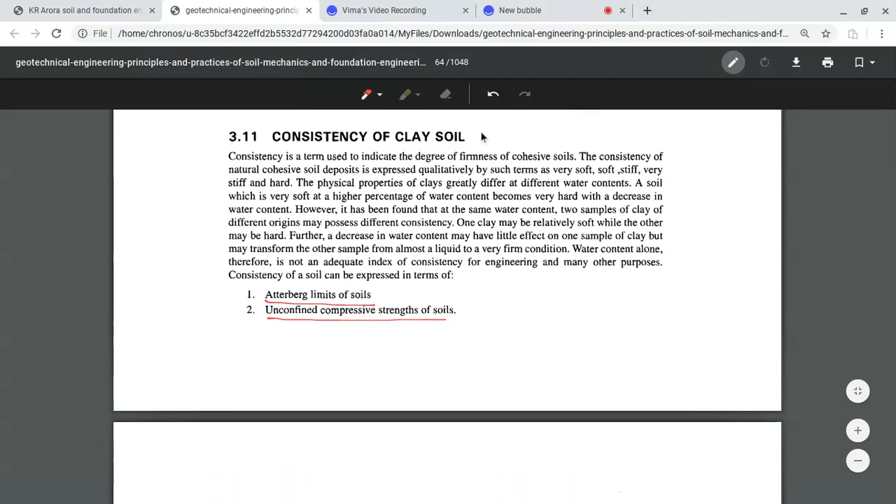Now, the consistency of clay soil. Water content alone is not an adequate index of consistency for engineering and other purposes. Consistency of soil can be expressed in terms of Atterberg limits and unconfined compressive strength of soil. Water content alone cannot explain the consistency, so Atterberg limits and unconfined compressive strength are necessary for the consistency analysis.

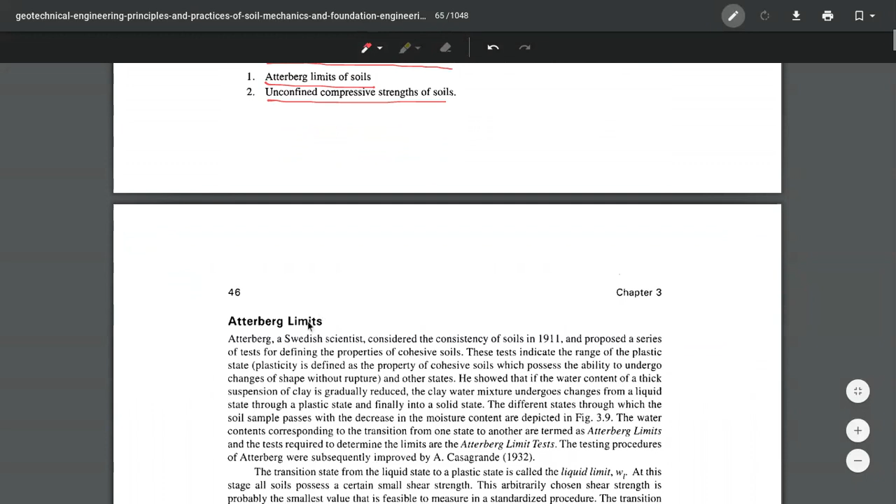Atterberg, a Swedish scientist, considered the consistency of soil in 1911 and proposed a series of tests for different properties of cohesive soil, indicating the range of plastic state of cohesive soil which possesses the ability to undergo changes of shape without rupture.

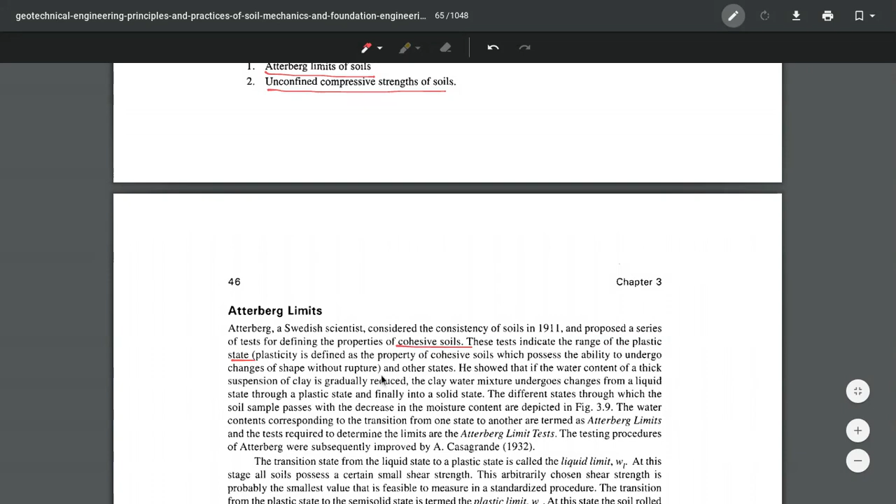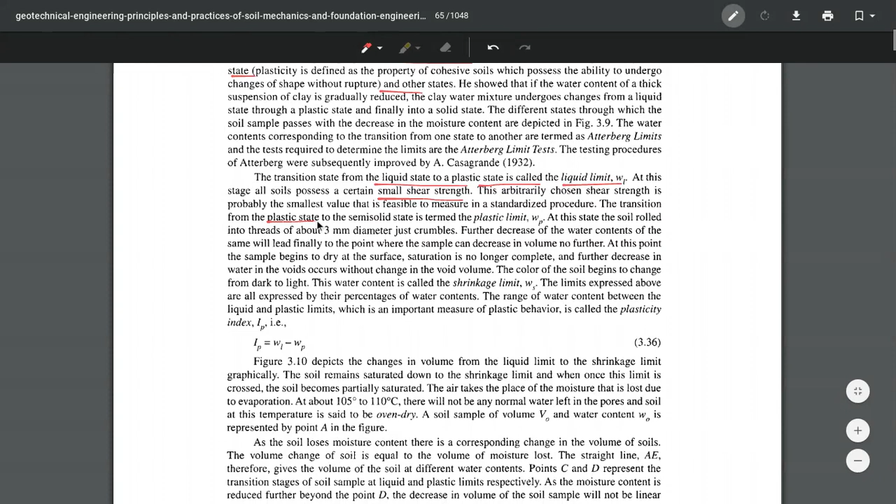Another state: the transition state from liquid state to plastic state is called the liquid limit. At this stage, all soil possesses certain small shear strength, shear strength is started on the soil. The transition from plastic to semi-solid state is the plastic limit (WP). WP is the corresponding water content at that transition state.

At this state, the soil rolled into threads of about 3 mm diameter just crumbles at the plastic limit. Further decrease of water content will finally lead to a point where the sample cannot decrease further in volume.

At this point, the sample begins to dry at the surface and saturation is no longer complete. Further decrease in water in the void occurs without change in void volume. The color of the soil begins to change from dark to light. This water content indicates the shrinkage limit (WS). These limits are all expressed as percentage of water content.

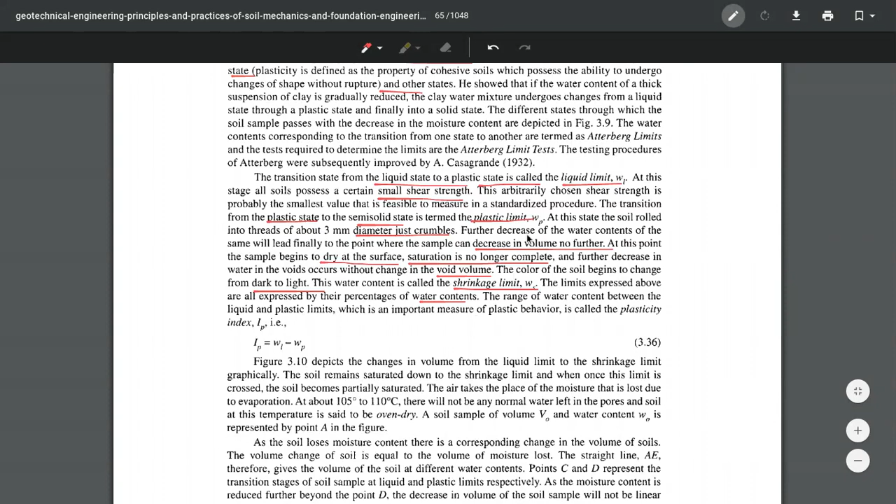Plasticity index equals liquid limit minus plastic limit.

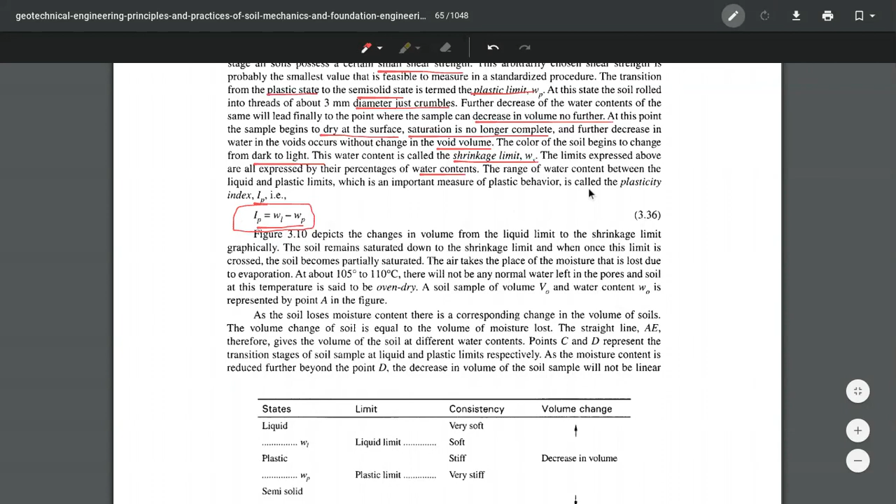This is liquid limit, plastic limit, shrinkage limit, and solid state.

This is the transition point at which shear strength just starts to be gained on the soil on further decreasing volume, and this is water content. Volume also decreases on decreasing water content. The soil just crumbles at the plastic state. Volume further decreases and a semi-solid state is obtained. This is the shrinkage limit; volume remains almost constant from semi-solid to solid state, with only decreasing water content.

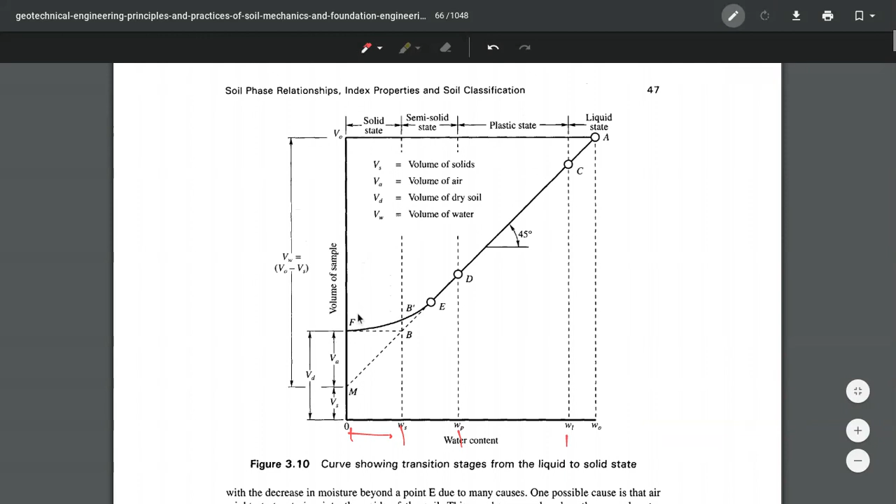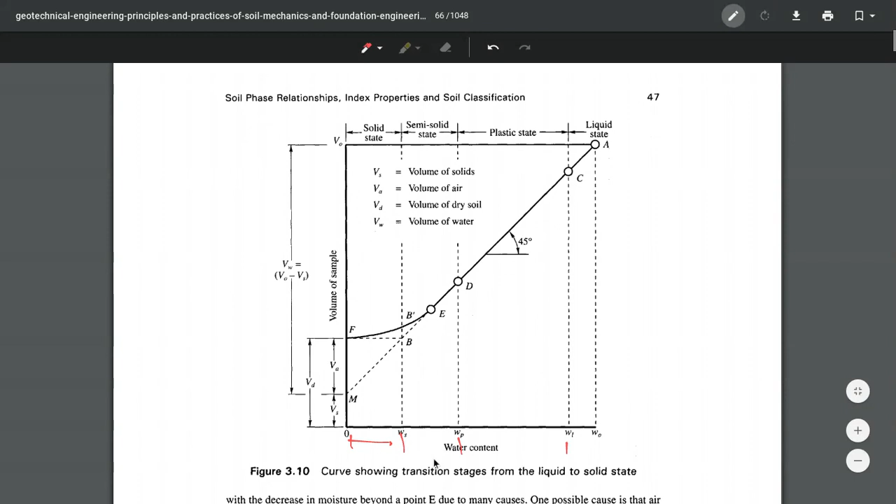This is called liquid limit, plastic limit, shrinkage limit, and liquid limit minus plastic limit equals plasticity index.

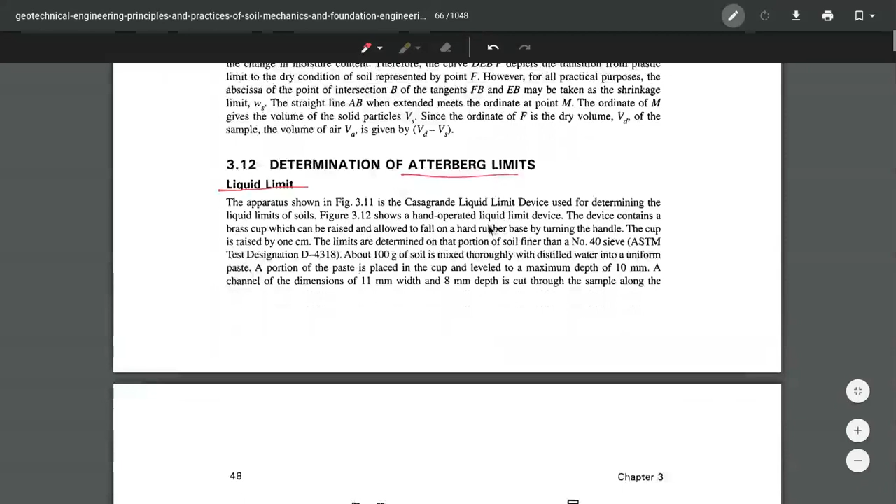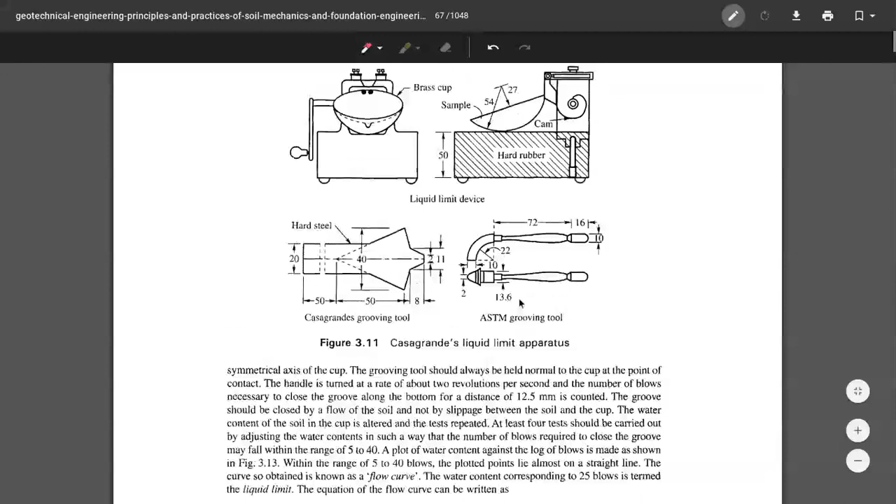Determination of liquid limit. These Atterberg limits are liquid limit, plastic limit, and shrinkage limit. This is the Casagrande liquid limit tool for the determination of liquid limit.

N is number of blows. C is a constant, IF equals the slope of the flow curve. Water content W equals minus IF log n plus C. The water content corresponding to 25 blows is termed the liquid limit.

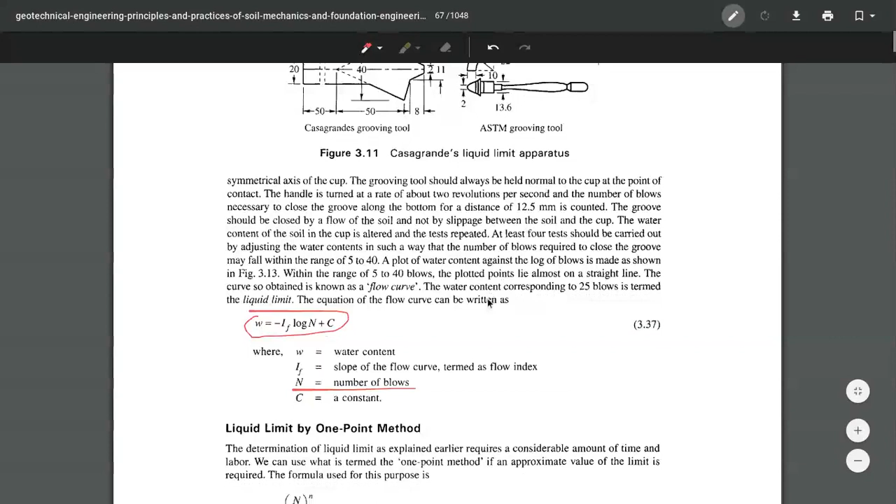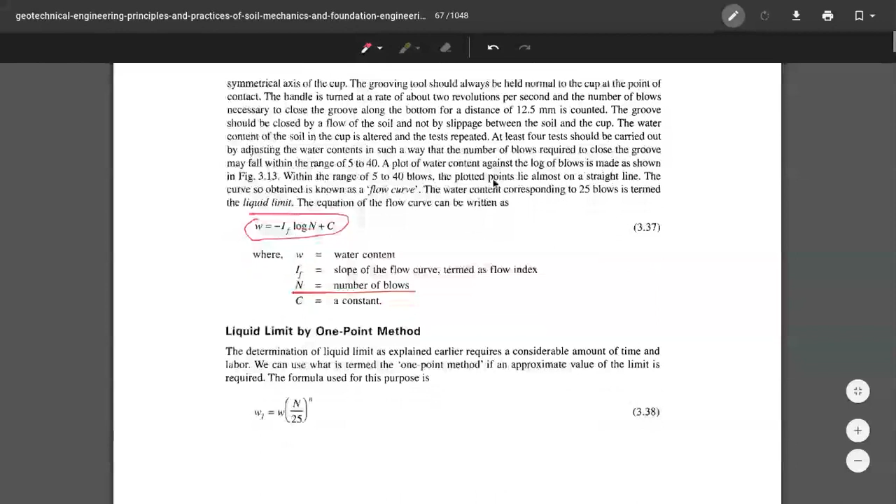In the Casagrande liquid limit approach, the water content corresponding to 25 blows is termed the liquid limit, from the liquid limit test analysis. So water content equals minus IF log n plus C, where n equals 25, C is any constant, and IF is the slope of the flow curve.

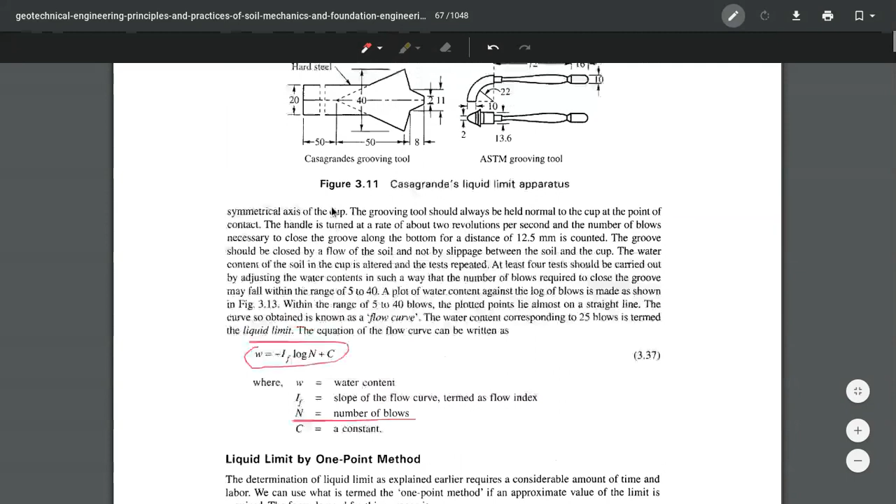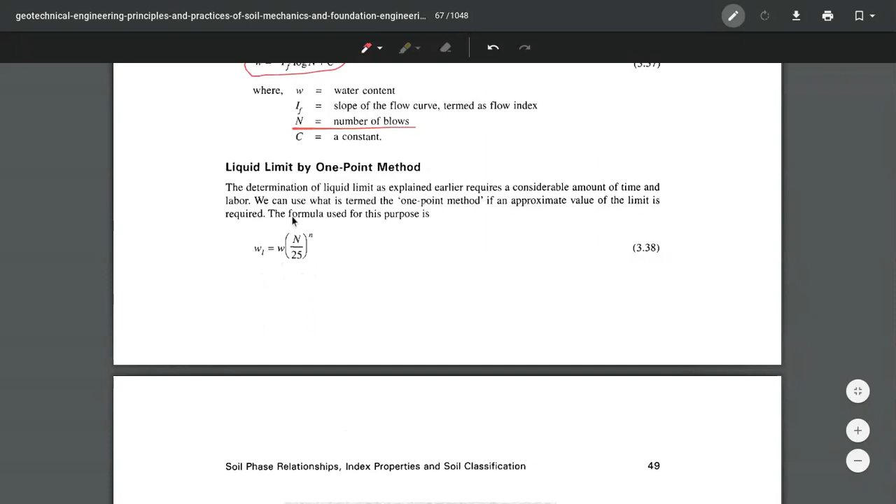By the single point method, liquid limit WL equals W times (n/25) to the power n, where W is the water content at n blows, corresponding to 25 blows.

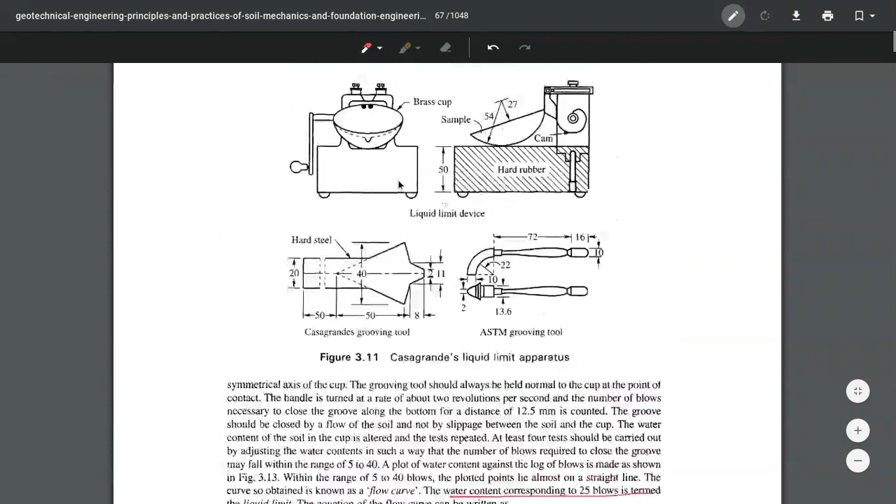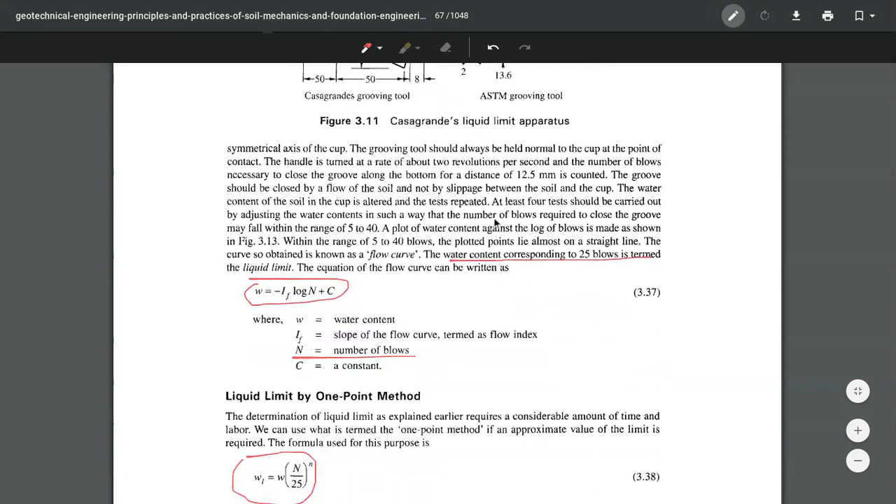This apparatus is used with 2 revolutions per second applied on the blow. Blows are applied at 2 revolutions per second.

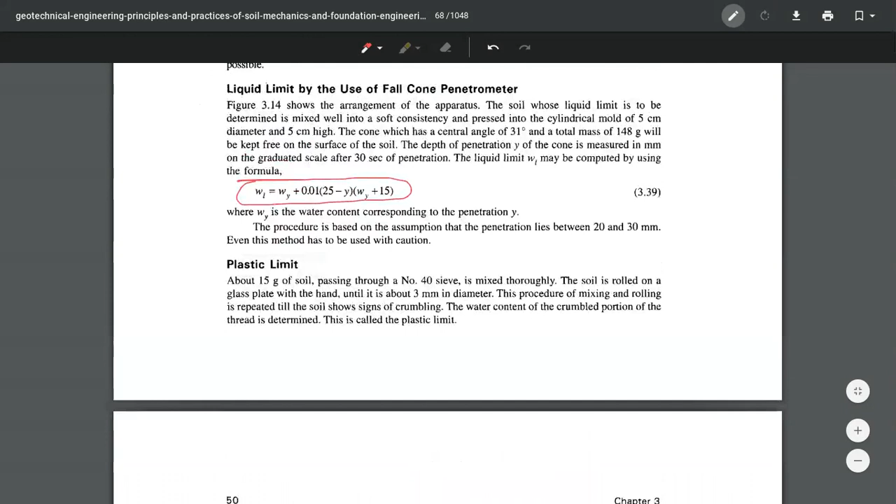About 15 grams of soil passing through the 0.425 mm sieve (number 40 sieve) is mixed thoroughly. The soil is rolled on a glass plate with the hand until it is about 3 mm in diameter, and the procedure of mixing and rolling is repeated until the soil shows signs of crumbling; the corresponding water content is determined. This is called the plastic limit.

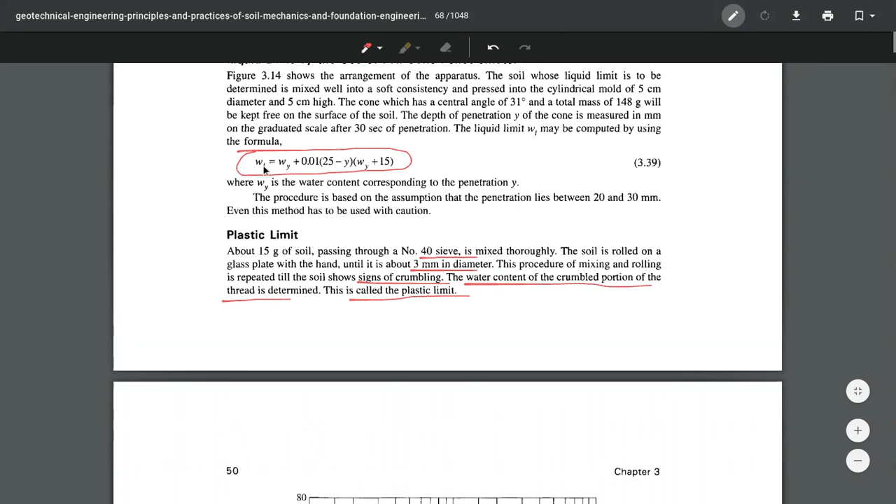At the liquid limit, shear strength just starts on the soil, and at the plastic limit the soil crumbles.

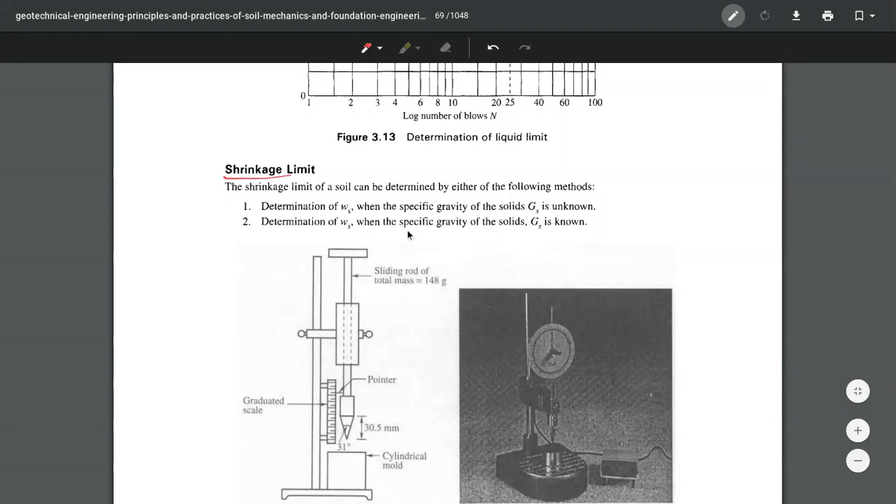Next, the shrinkage limit can be determined by the following method. When the specific gravity of the soil is unknown, the shrinkage limit corresponding water content is calculated differently than when the specific gravity is known. The method when specific gravity is unknown: shrinkage limit equals this formula.

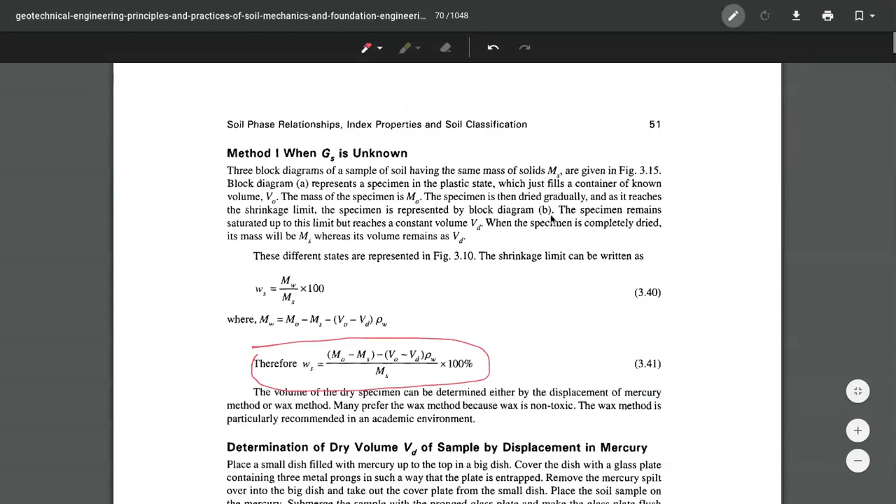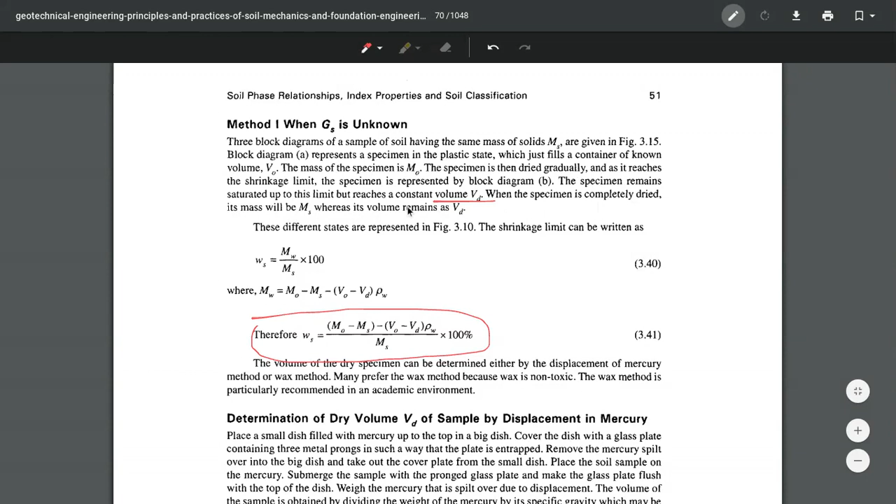Soil mass of solid ms and container volume V naught, mass of specimen m naught. The specimen is then dried till it reaches the shrinkage limit. This is represented by block diagram B, and the specimen remains saturated up to this limit but reaches constant volume V d.

W shrinkage limit equals m naught minus ms minus V naught minus V d times rho w, divided by ms, into 100%, where m naught equals mass of specimen, V naught is volume of the container, and ms is mass of solid.

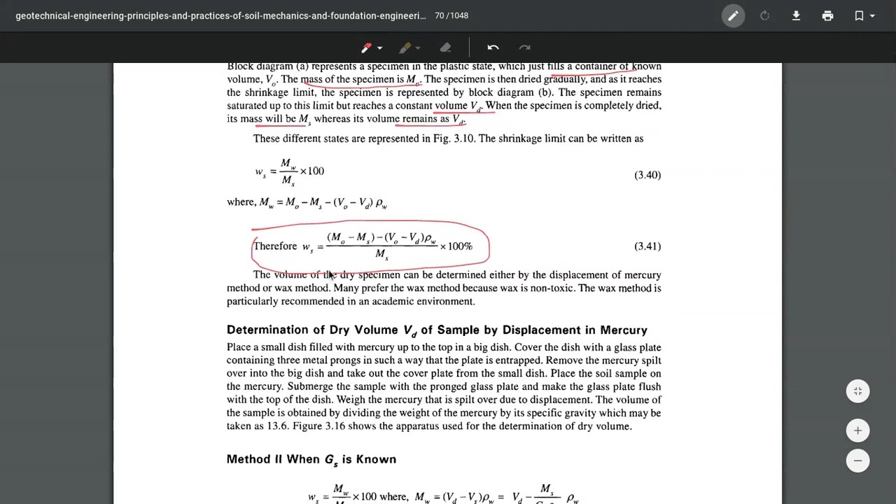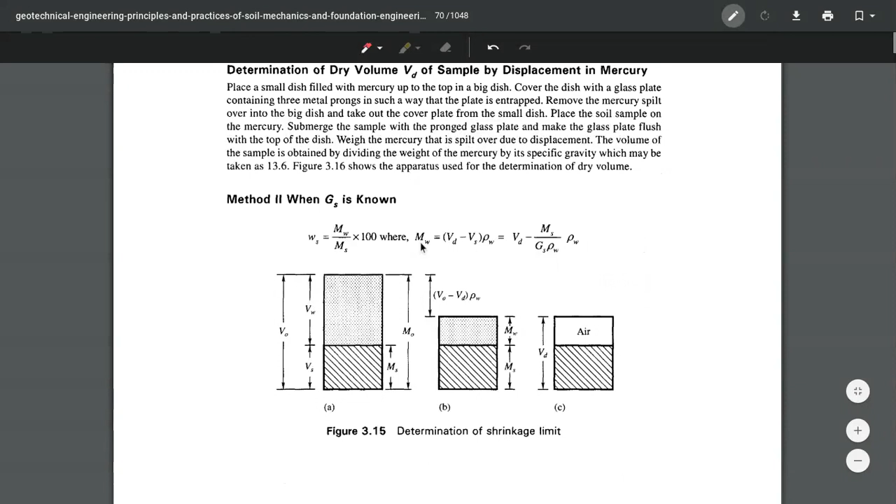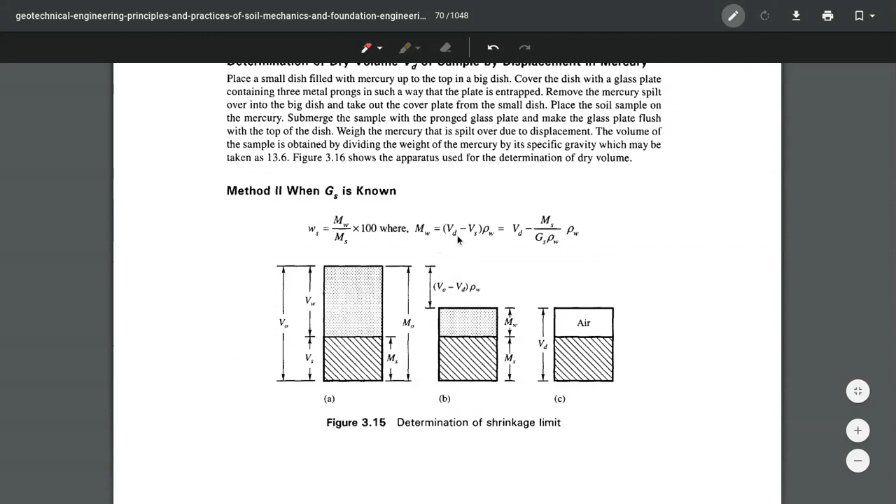Determination of dry volume of sample by displacement in mercury, V d. WS equals mass of water by mass of soil into 100% at shrinkage point. Mass of water equals dry volume minus volume of soil, into density of water, gives mass of water. V d represents no water, only soil and air.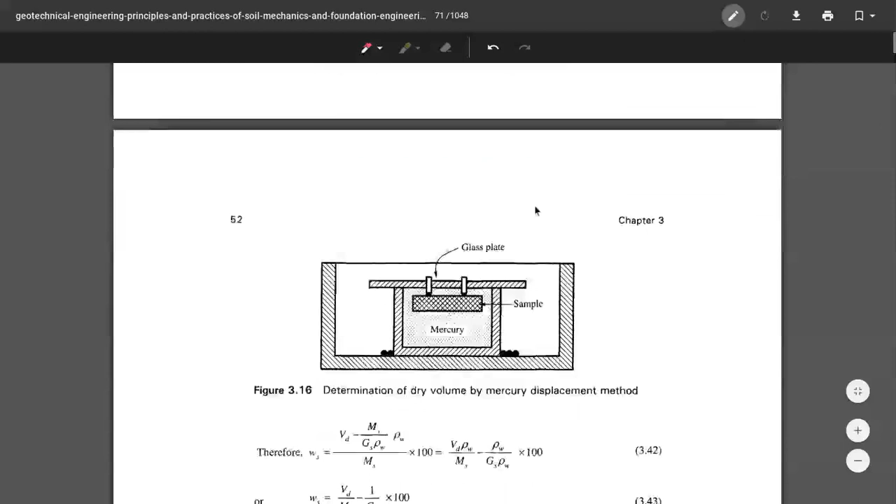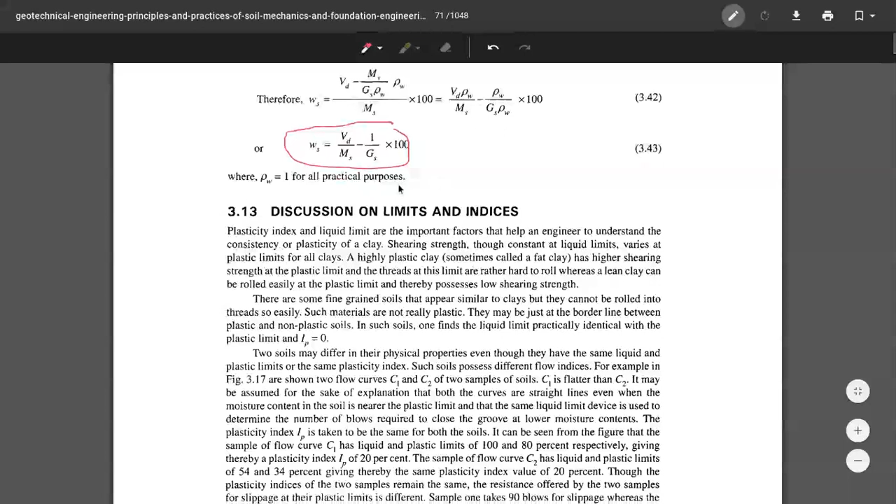Discussion on limits and indices. They may be just at the borderline between plastic and non-plastic, such that one cannot practically find the liquid limit, and the liquid limit becomes practically identical with the plastic limit, so plasticity index equals zero.

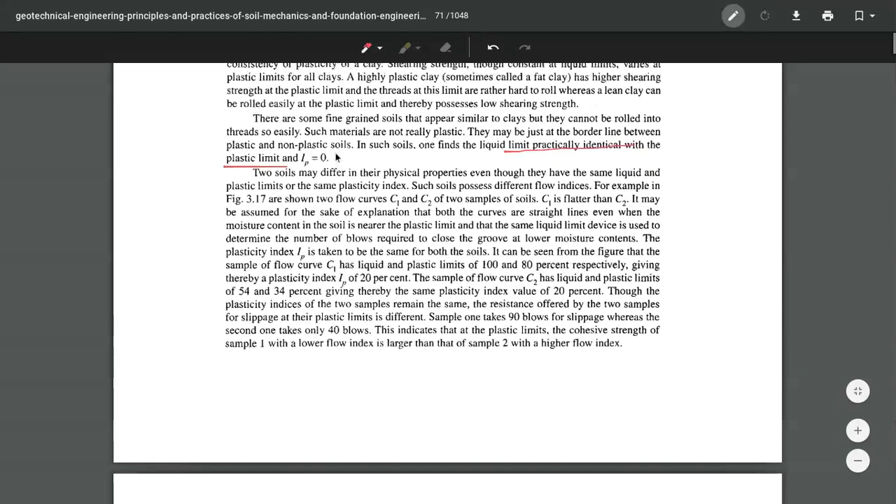There are some fine-grained soils that appear similar to clay but cannot be rolled into threads easily, so such materials are not really plastic - they cannot be rolled or crumbled. They may be just at the borderline between plastic and non-plastic soil, that is liquid limit equals plastic limit, so plasticity index is 0.

Plasticity index equals liquid limit minus plastic limit, plus 0 meaning non-plastic. Less than 7 is low plastic, 7 to 17 is medium plastic, and greater than 17 is highly plastic clay soil.

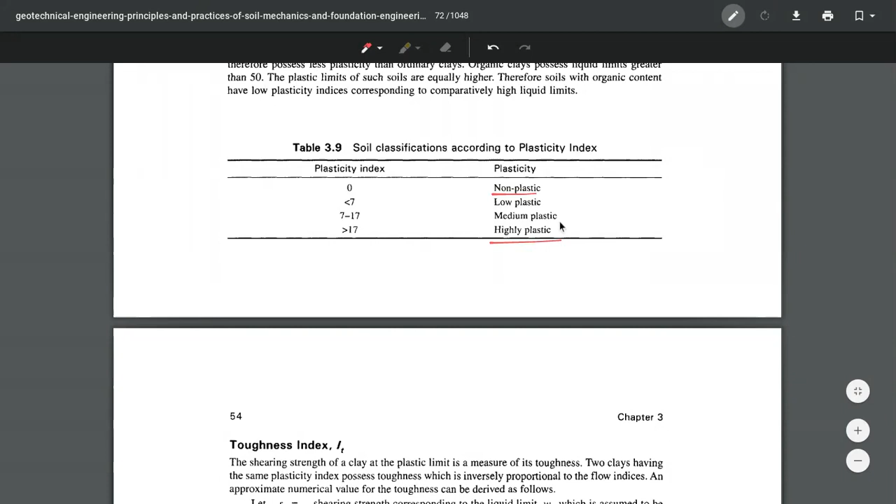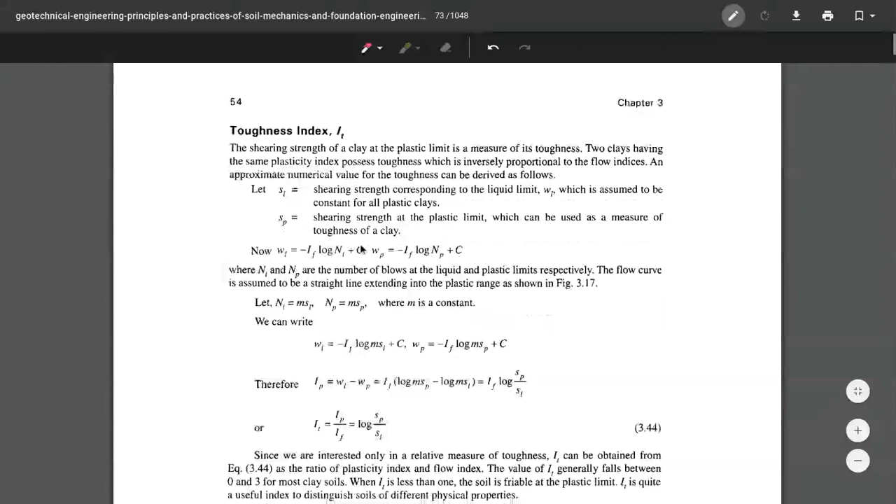Toughness index IT equals IP by IF, that is plasticity index by flow index IF.

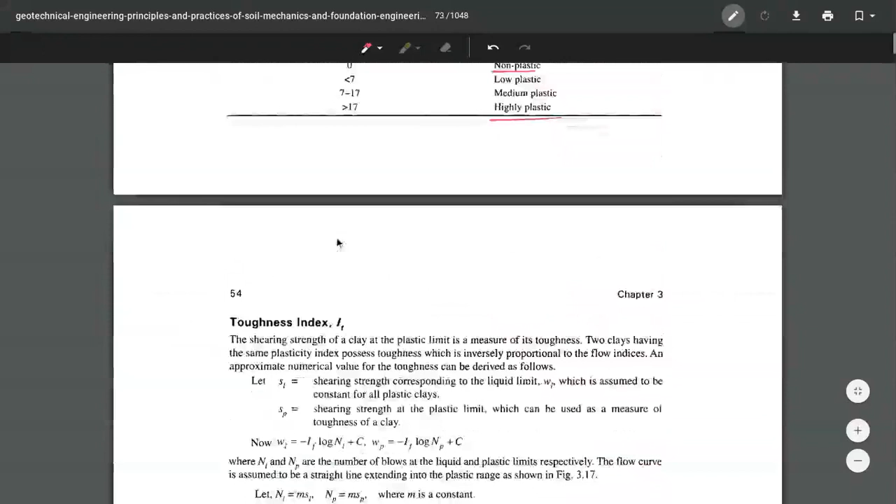Liquidity index equals WN minus WP divided by IP.

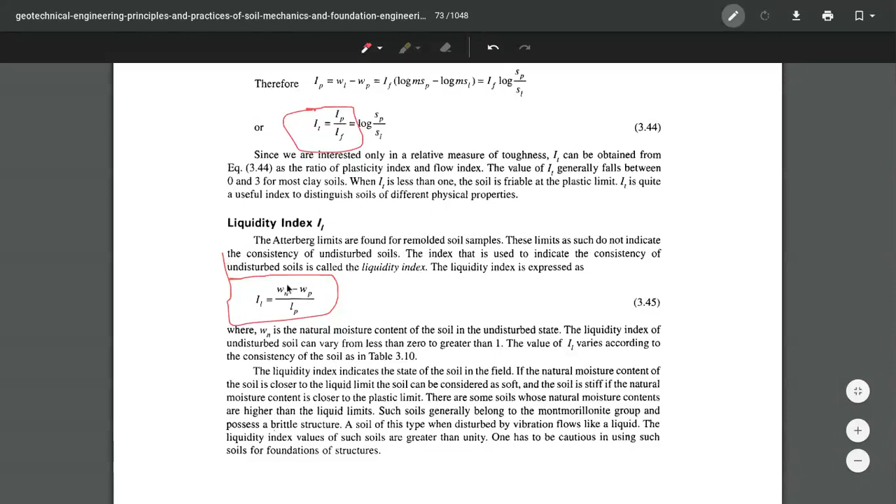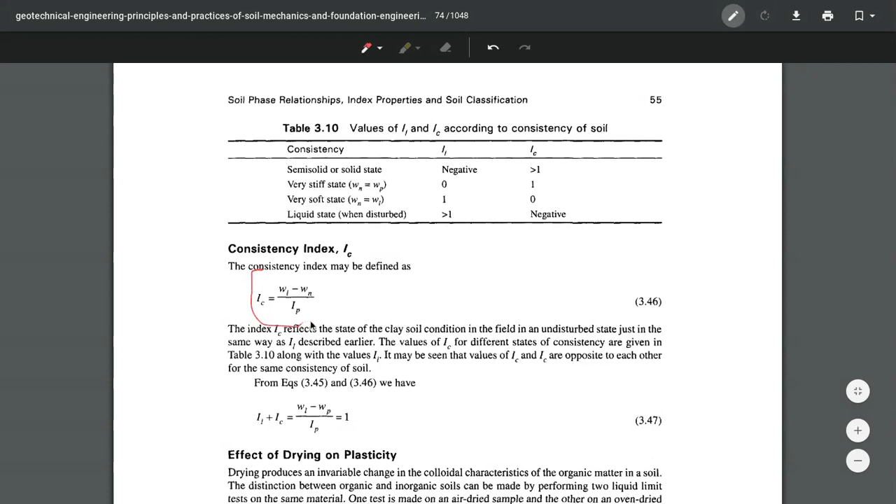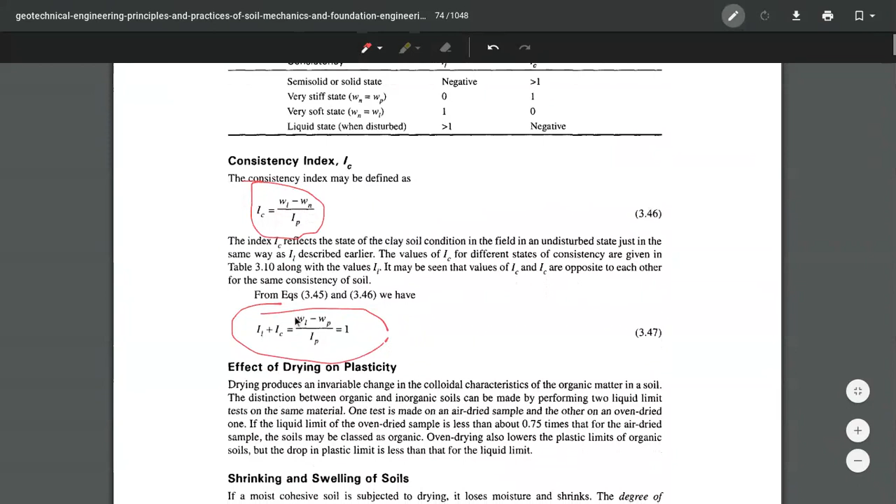Consistency index IC equals liquid limit minus WN divided by IP. Liquidity index IL plus consistency index IC equals 1.

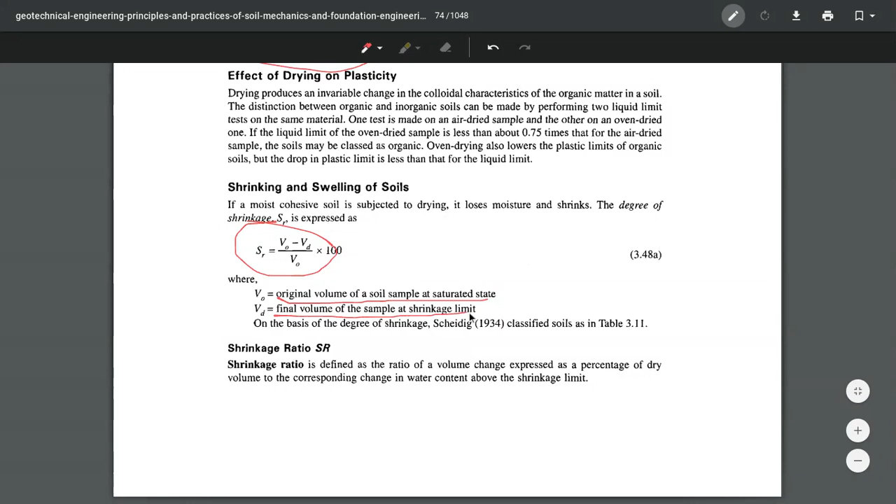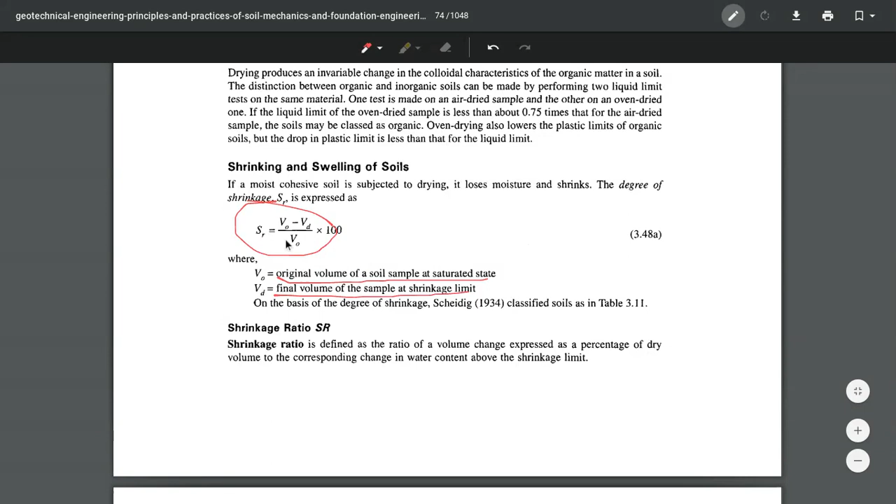Shrinkage and swelling, degree of shrinkage SR equals V naught minus VD divided by V naught into 100%, where V naught equals original volume of the soil sample at saturated state, and VD equals final volume of sample at shrinkage limit. This gives the degree of shrinkage.

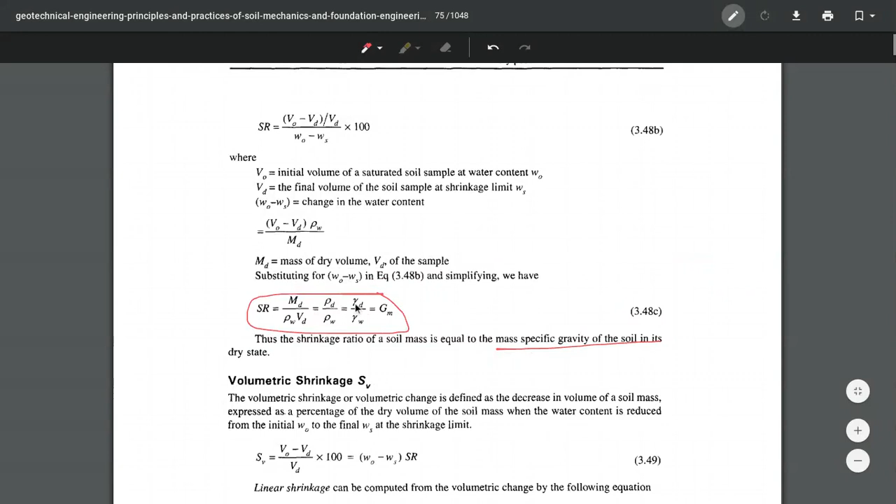Shrinkage ratio SR equals gamma D by gamma W. The shrinkage ratio of soil mass is equal to the mass specific gravity, SR equals gamma D by gamma W, or rho D by rho W. Mass specific gravity equals shrinkage ratio SR.

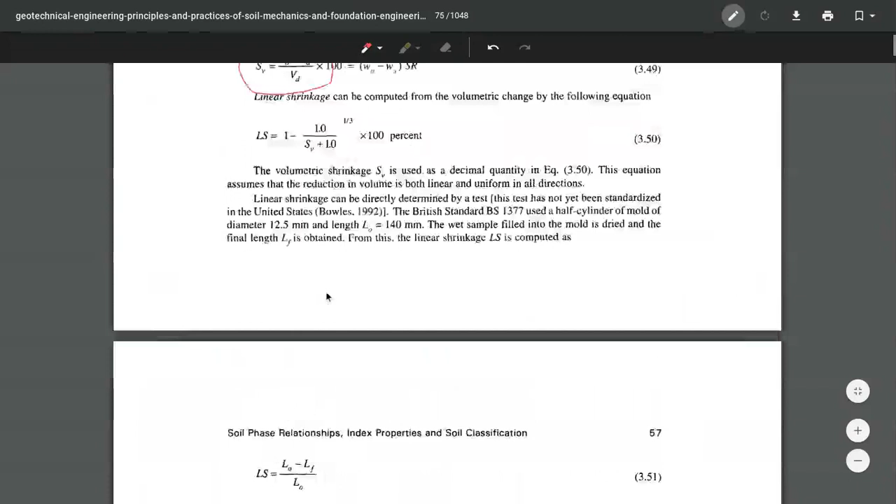Volumetric shrinkage SV equals V naught minus VD divided by VD into 100%. This is the general formula: V naught minus VD by V naught into 100%. Then volumetric shrinkage SV equals W naught minus WS into SR.

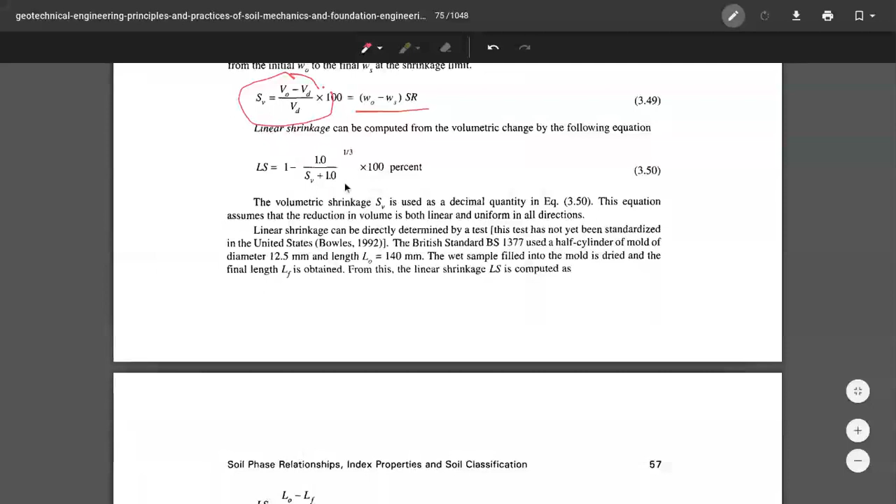Linear shrinkage equals 1 minus the cube root of 1 by SV plus 1, into 100%, equal to L naught minus LF divided by L naught.

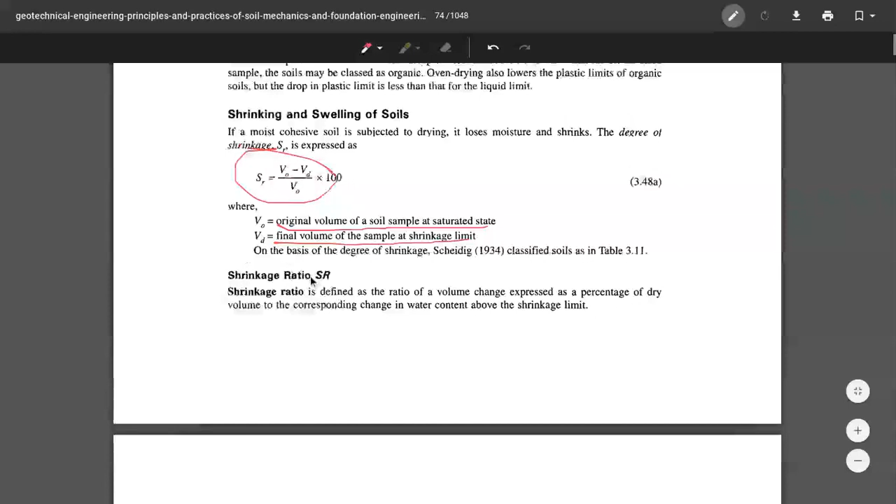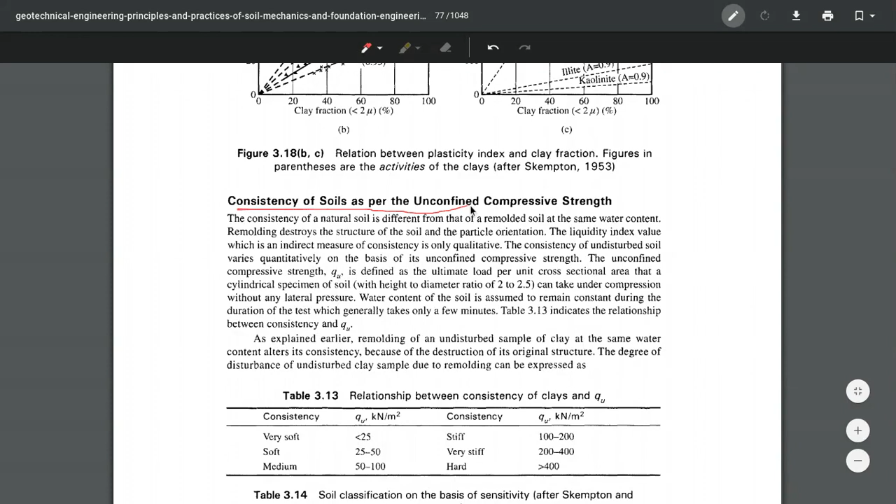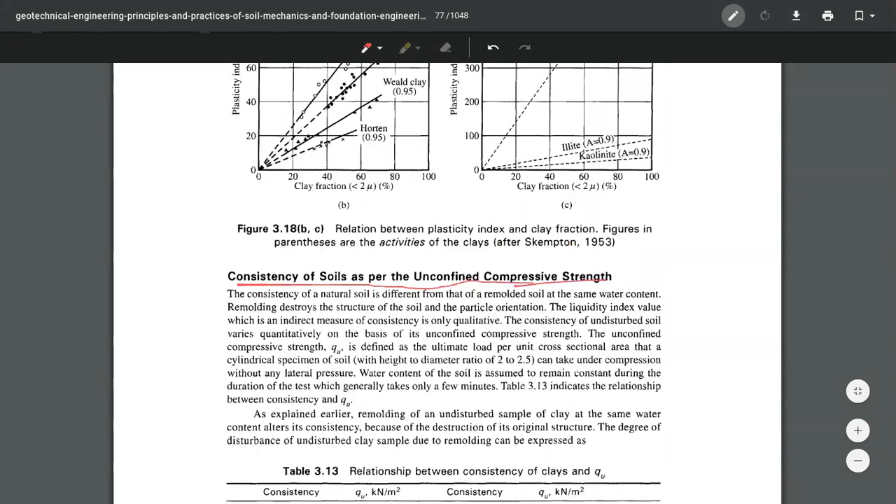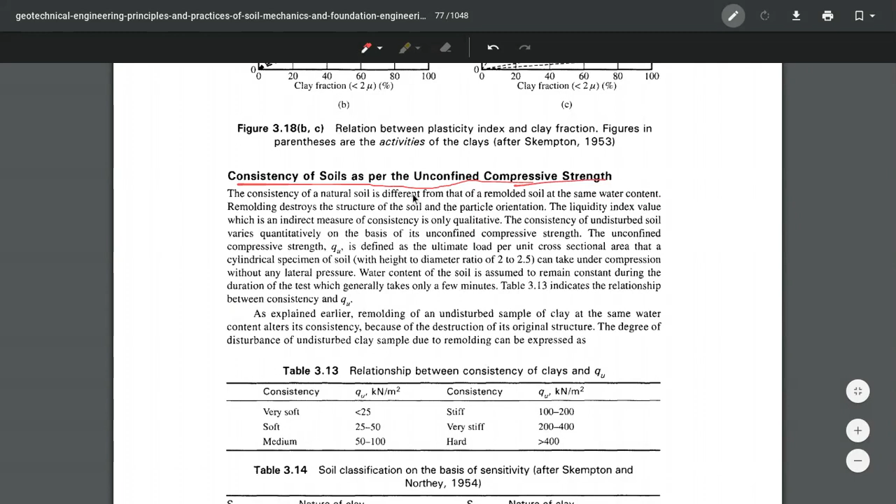Consistency of soil analysis is done by unconfined compressive strength. We have discussed index properties - shape and size by sieve analysis, hydrometer analysis, and Stokes law analysis - and other consistency and relative density analysis. Consistency analysis is done using water content analysis and Atterberg limits, that is liquid limit, plastic limit, etc, and now by unconfined compressive strength analysis. These are methods for consistency and relative density, sieve analysis for grain size and shape, and consistency analysis.

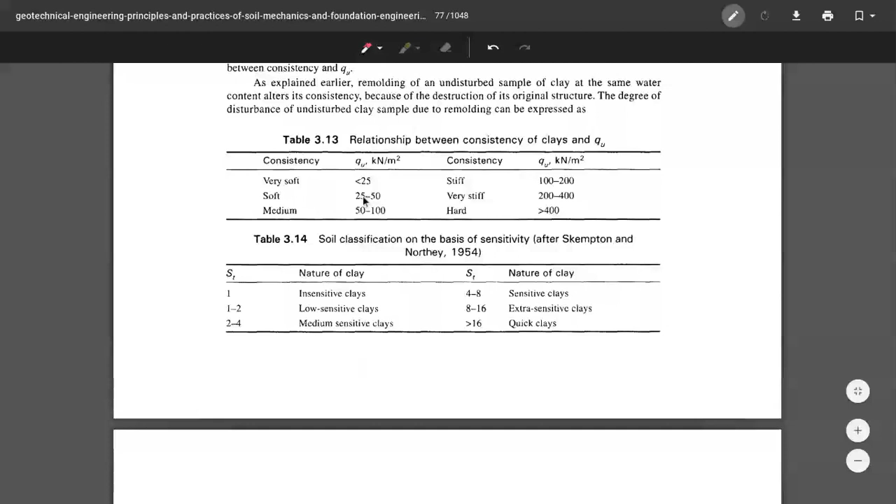Unconfined compressive strength less than 25 is very soft, 25 to 50 is soft, 50 to 100 is medium, and this range is stiff to hard. This is the main result of the unconfined compressive strength analysis.

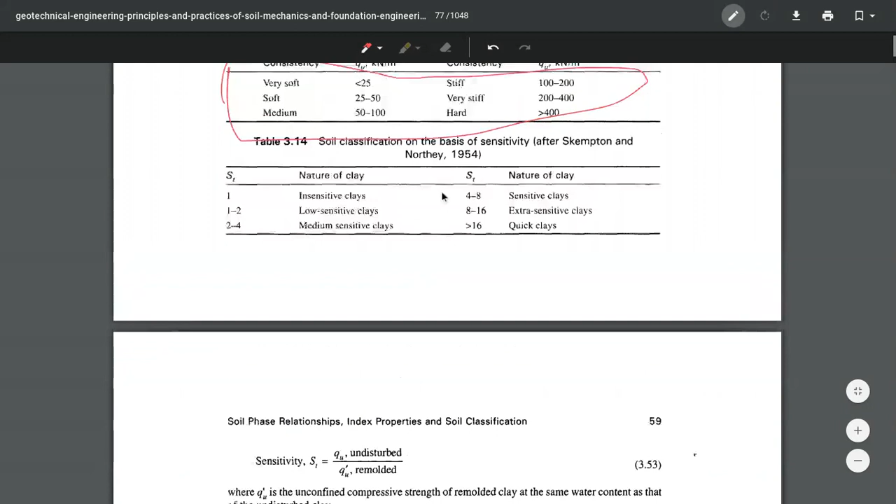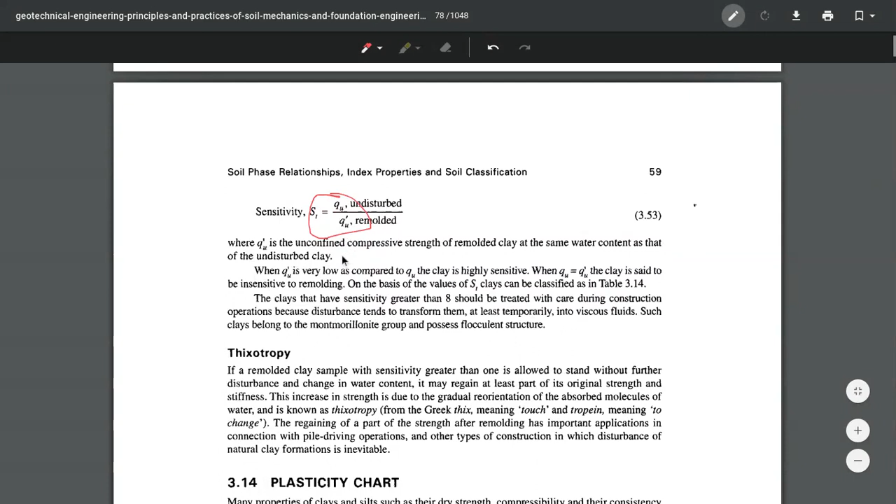And the basis of sensitivity classification: sensitivity St equals QU by QU dash, which is undisturbed unconfined compression strength by disturbed remolded soil compressive strength. Now, thixotropy.

If a remolded clay sample with sensitivity greater than 1 is allowed to stand without further disturbance and change in water content, it may regain at least part of its original strength and stiffness. This increase in strength due to gradual reorientation of the absorbed molecules of water is known as thixotropy.

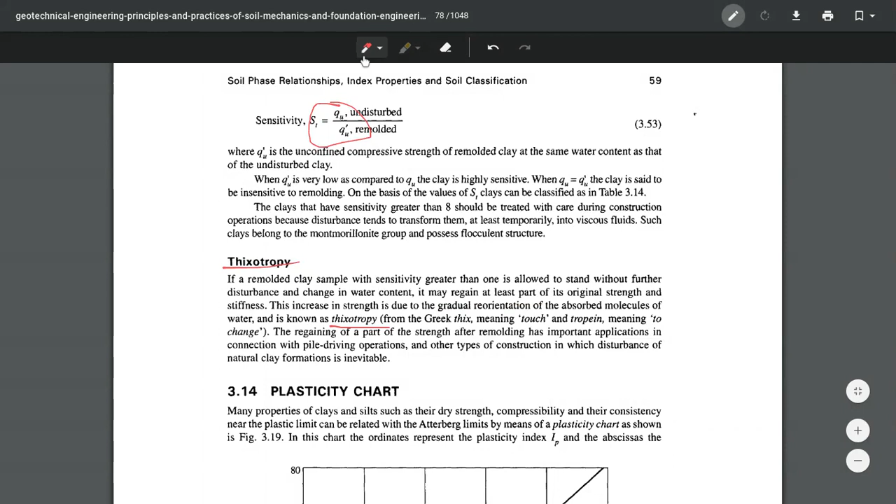Regain of increase of strength due to gradual reorientation of the absorbed molecules of water is known as thixotropy - the change and increase of strength due to gradual reorientation is thixotropy.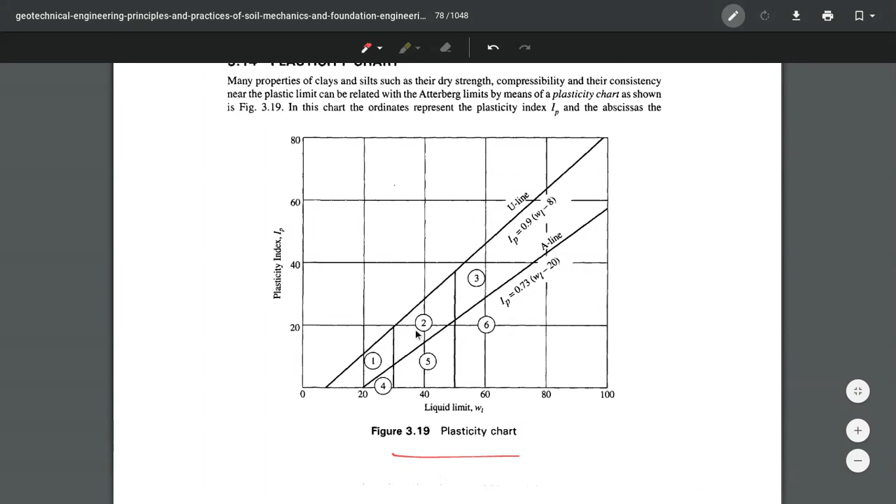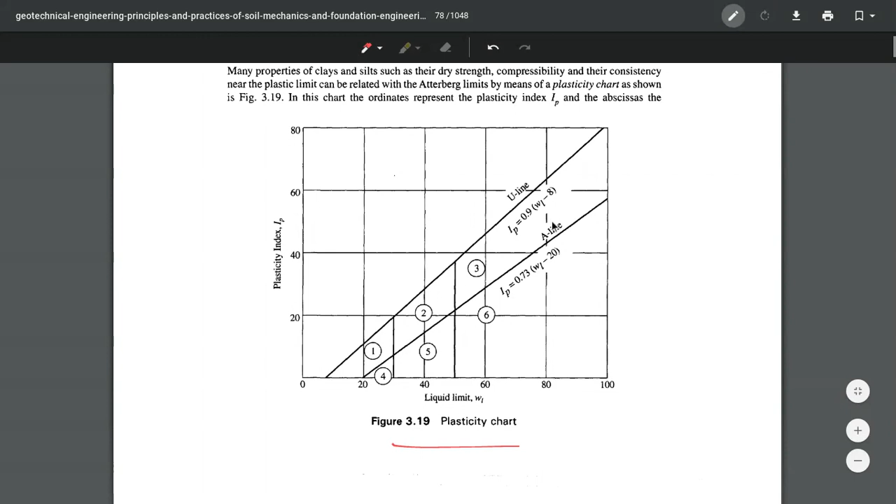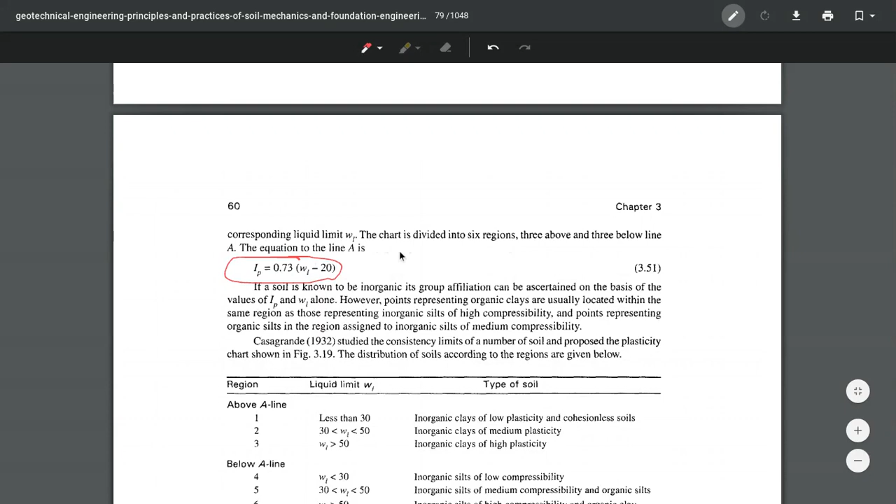Plasticity chart. This is the plasticity index versus liquid limit chart shown here, with higher plasticity, U line, A line, and plasticity index marked.

Classification of soil is done by this line. The chart is divided into 6 regions, 3 above and 3 below line A. The equation for line A is IP (plasticity index) equals 0.73 times (liquid limit WL minus 20), and the equation for line U is 0.9 times (WL minus 8).

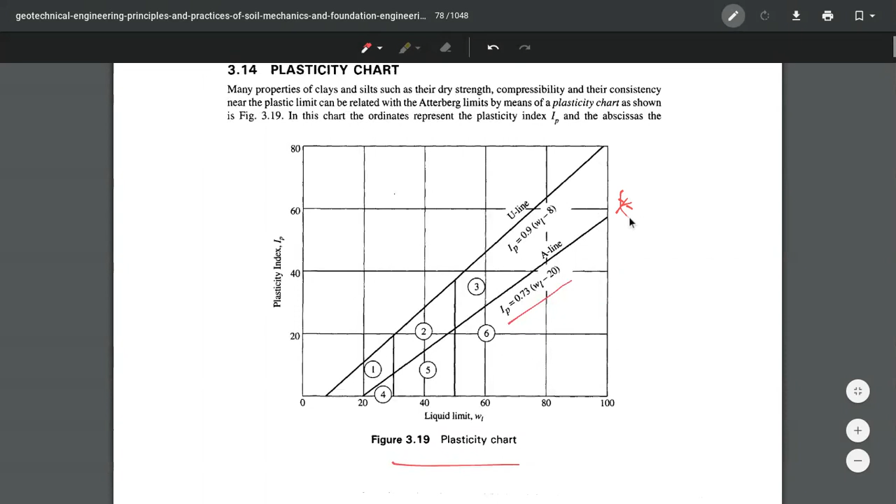This plasticity index chart is used for the classification of soil. The line equation is 0.73 WL minus 20 equals IP.

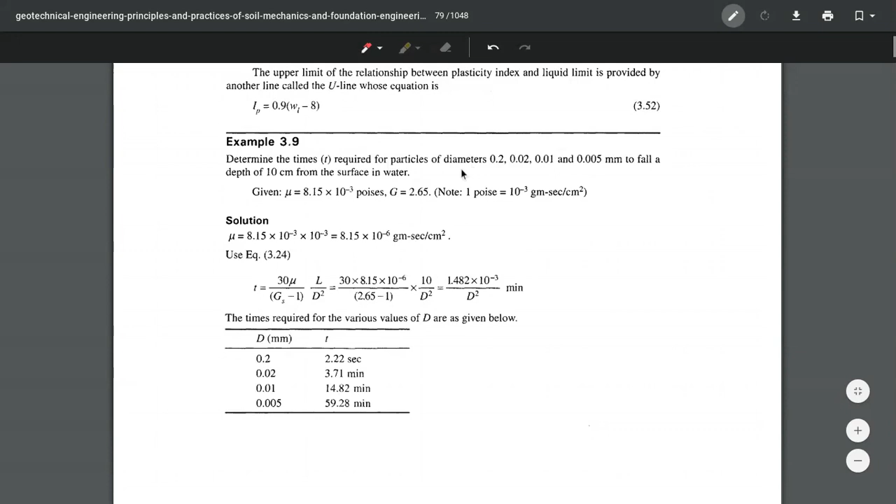Now for numerical examples: determine the time required for particles of diameter 0.2 and 0.02 to fall a depth of 10 cm from the surface in water. This is based on Stokes law.

Using Stokes law, the coefficient of viscosity is given as 8.15 times 10 to the power minus 3 poise, and specific gravity equals 2.65. Note that 1 poise equals 10 to the power minus 3 gram-second per cm square.

This is the viscosity in terms of gram-second per cm square, with 1 poise as 10 to the power minus 3. So mu is 8.15 into 10 to the minus 3 into 10 to the minus 3 gram-second per cm square. We have to determine time, t equals...

Time t equals 30... velocity equals L by T, and for diameter we already know the formula.

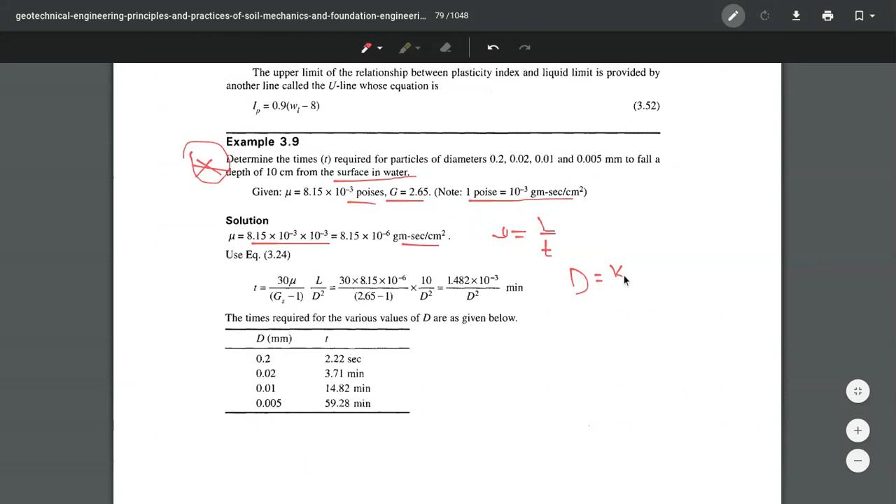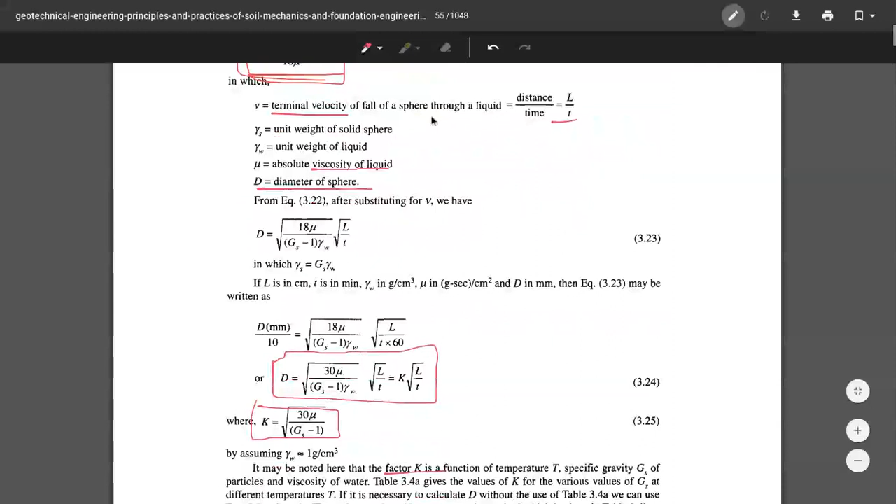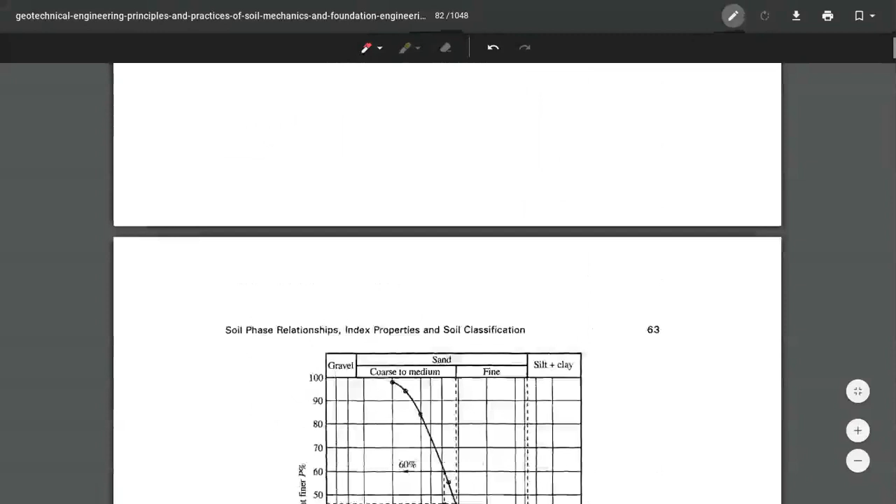From the equation we get T equals 30 mu by (GS minus 1) into L by D square, where D equals K times root over L by T, giving T equals K into L by D square.

K equals root over 30 mu by (GS minus 1), so K square equals 30 mu by (GS minus 1) into L root by D square.

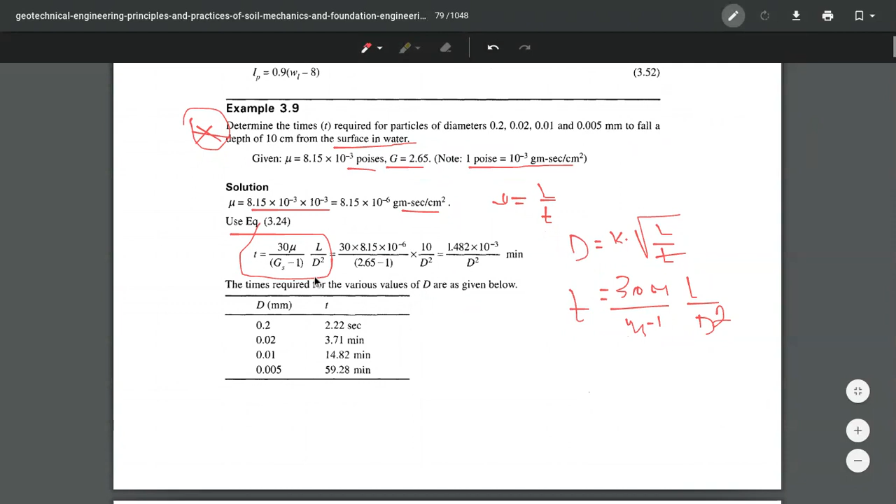We have already seen this time T formula. We have to find the time required for the particles of these four diameters to fall for a depth of 10 cm. Since diameter and length are given, we can directly determine this from the equation.

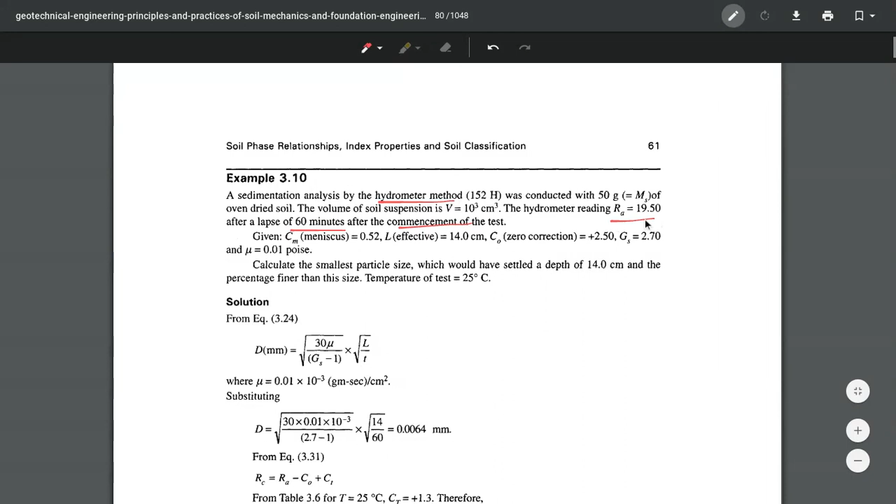Now problem 3.10: sedimentation analysis by hydrometer method. On pipette, a hydrometer test was conducted with 50 gram mass of soil oven dried, and the volume of soil suspension is given. Hydrometer reading RA is taken after a lapse of 60 minutes after the commencement of the test. Given Cm equals 0.52, L effective equals 14 cm, zero correction plus 2.50, specific gravity GS equals 2.70.

We have to calculate the smallest particle size which would have settled to a depth of 14 cm, with the percentage finer found at a temperature of 25 degrees Celsius.

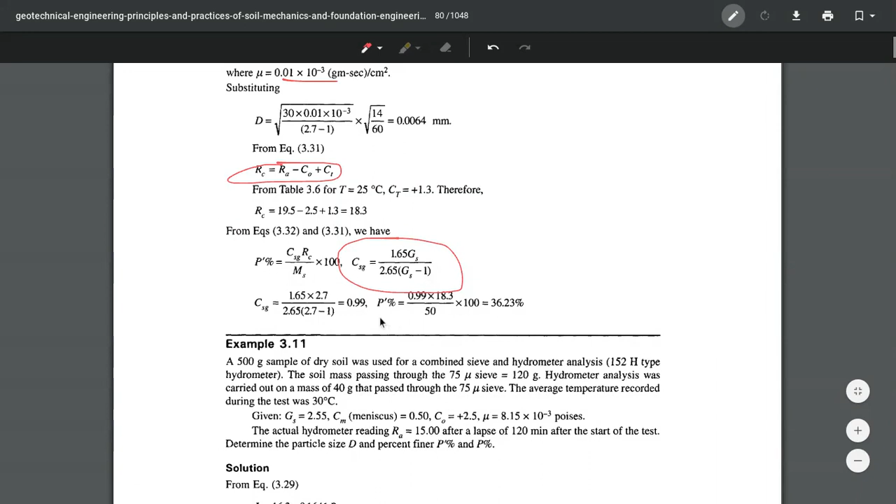Calculate the smallest particle size and the percentage finer at this size.

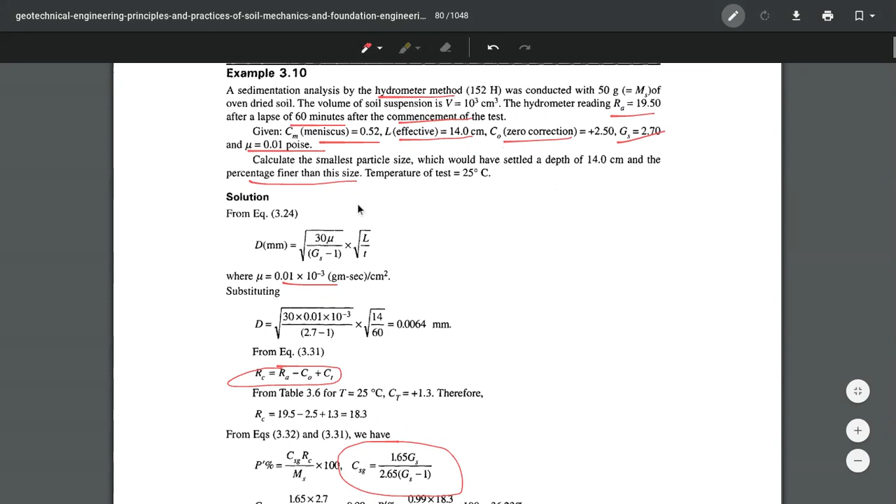Next is problem 3.11, with a 500 gram sample.